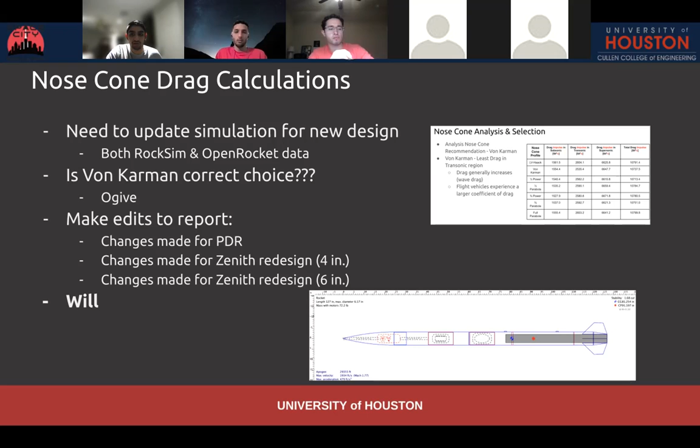Moving on to fin design, Gustavo, this is something you've been tinkering with on the new boat tail section, just modifying the fins and seeing what we can do to increase our apogee. But I think if we can give analysis and our validation team, specifically Mic and Amy, the chance to come up with one of their own designs independently. I know Mic was working on her own simulations trying to optimize a trapezoidal fin, but maybe now you guys can think more outside the box and try to get our 6-inch OpenRocket and RockSim files to 30K.

And yeah, I think structures is okay with putting fins directly onto the end of the boat tail, if I'm not wrong, if there are any limitations with that manufacturability-wise. Yeah, there is some limitation, but it's a challenge that they're willing to take if it's the only way we can come up with. But on top of this design you have here, there's two other things I've come up with, and the basis for the designs is one, not changing anything that's inside the rocket.

So for this one right here, I think one of the things that needed to be done was shift the center of gravity further forward by putting the avionics bay in the nose cone, and then all the recovery stuff can go between avionics bay and payload bay. That's gonna take some more work in terms of figuring out how that's all gonna work out. So a big plus would be if we can come up with an idea that keeps anything from shifting around within the rocket, so ideally all you have to do is mess around with the fins.

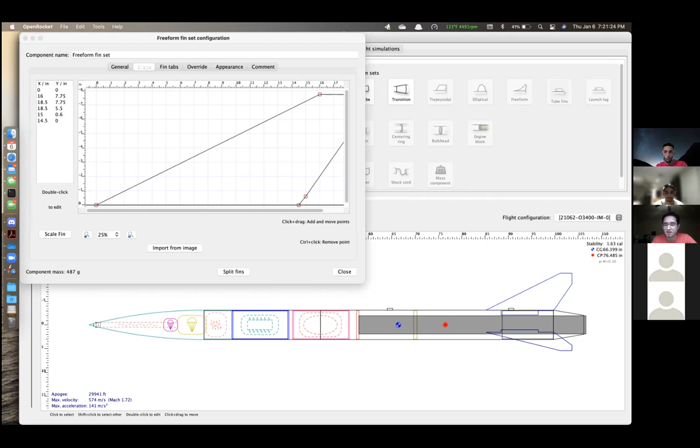Because it lands kind of vertically, face pointing up, the fins would take the brunt of the impact and they could crack. And if they were to crack, then you lose a lot of points in your flight performance. So yeah, the idea is they can sweep back, but a huge thing to consider is don't make them sweep back behind the end of the motor.

Gotcha. And then the other one I have, if you guys want to look at it, is this one - played around a little bit, 1.55 and then 30,200. The big perk here is that everything stays how it has been designed thus far, so you don't have to go through the trouble of redesigning a whole bunch of stuff.

Another thing, like you said Ravi, is the boat tail including the fins is a challenge. So if whoever decides to work on it later can come up with something that keeps it on the main airframe section, that's ideal as well, more so than having it integral with the boat tail. I'll hand it back to you.

Thank you for that. Wait, I have a question - what's the purpose of the boat tail?

The boat tail is really just to reduce drag. How it works exactly is a little beyond me and the scope, but just adding a boat tail does a lot for reducing the drag, and it's kind of surprising how much it helps - some like 2,000, 3,000 feet in savings there.

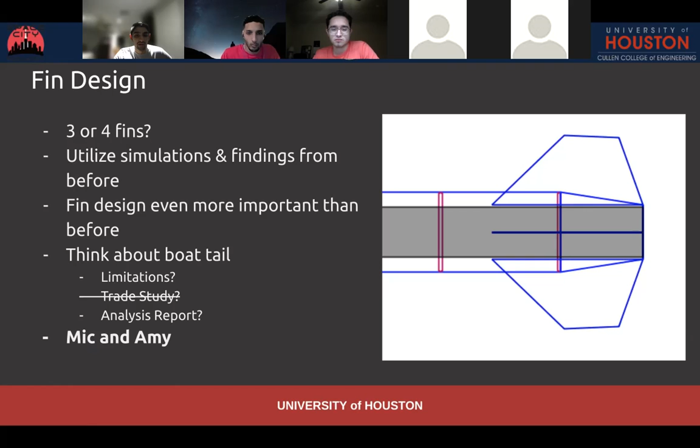Gotcha. So Mic and Amy, just keeping those points in mind - open to 3 or 4 fins, within the realm, trying to keep everything the same within the design and just changing the fins, and preferably not venturing onto the boat tail, although if you do need to, it is possible.

So that brings us to the fin flutter analysis. It was relatively easy to calculate with our trapezoidal fin shape from Apogee Components and their newsletter with their equations. Most likely, I think with your fin design, you may find that non-trapezoidal or a free-form set of fins may perform better. So I think Randy recommending the RasAero tool for fin flutter will be super helpful.

But I know Montreal used, I think, 2 or 3 different ways and then compared results with those different formulas. I looked into some of them and some of them seem super complicated, and I honestly doubt if they genuinely did all the calculations, because it's a crazy amount of partial differential equations and matrices, all for calculating flow and drag and a bunch of nasty stuff. So I haven't taken a look at RasAero's stuff yet, but that should be helpful.

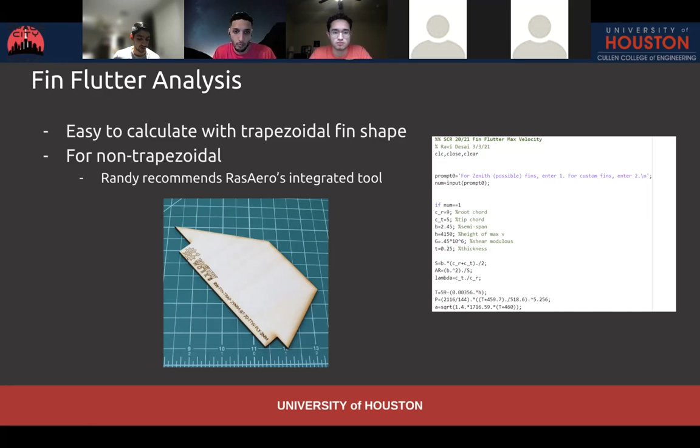And I think kind of cross-checking as you move along with your fin design, what your fin flutter analysis or fin flutter velocity looks like, because OpenRocket may say we can get to 30,000, but if our fins are going to flutter, then there's no point in using that design, obviously. So cross-checking as you move along in the design will be helpful and something you should do.

And the main things I would want to gather from an FEA on the boat tail would be some stress points, and then also a thrust value or force that we can say will start to cause deformation and failure.

Unfortunately, I believe we're planning to manufacture the boat tail out of fiberglass, which, as we all know, is absolutely fun for FEA.

So maybe simplifying and talking to Andrew again about how he could approach this, and also talking to Structures about their ideas for the motor retention system, and also how the fins will be secured, which I guess also plays into the fin design and when that gets finished up.

But I think starting with the CAD of the boat tail and thinking about how our motor may be secured, and how we can calculate a thrust or force value that will cause deformation failure, should be good.

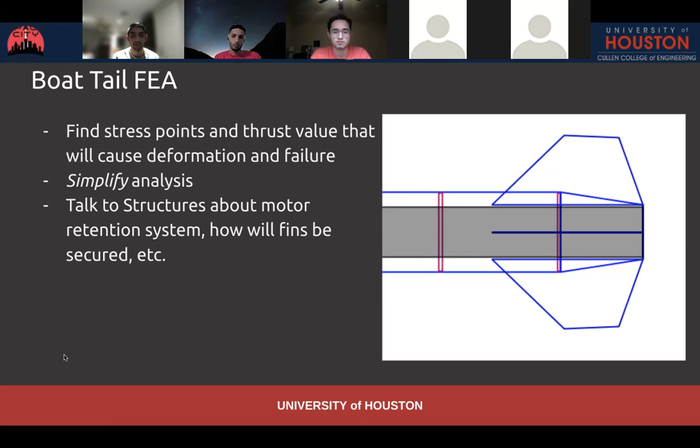And now onto CFD. I think I recorded this earlier as well, but just to restate, for the rest of the design team, I know the Zenith CAD is kind of up to date, minus the boat tail and the fins, which I guess are to be decided.

So I think transitioning into CFD now will give us a lot of benefits, if not for this semester, definitely as SCR grows older and into the next year and years past.

So I would like us to use our learning FEA experience to hopefully help us transition into CFD much easier. And I think the three biggest ways in which we learned from FEA, and obviously everyone learns differently, are watching some YouTube videos about the software and the goals you're trying to achieve, and then finding learning resources outside of that.

So I know for Siemens, there's a bunch of forums online where you made your account, and I think they also have their own set of videos and learning material within each software. And then also just beginning to research maybe outside of rocketry in general.

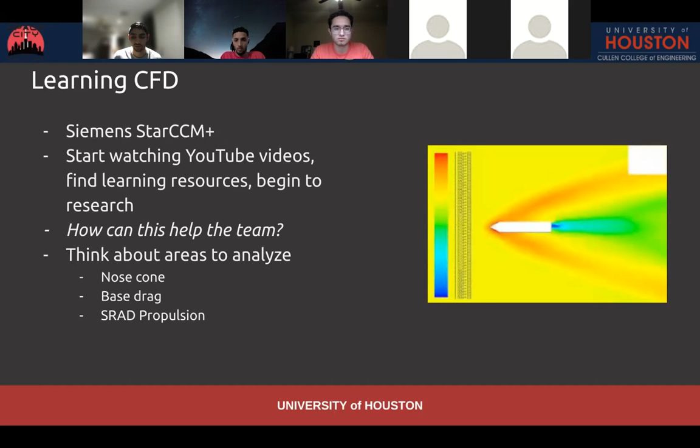But I think the further goal that I would have with this is to ultimately aid SRAD propulsion in their designs, because I know Aussie was looking at using CFD to start to analyze how their motor and engine design could be optimized. So kind of one for the future and one that will take a lot of time, but getting started as soon as possible, I think, is the best move for us as a team.

So our action items: Will is working on the nose cone drag calculations, and I'll help you out with the RockSim stuff. After you finish that up along with the report, we'll move on to helping Mic and Amy with the boat tail fin design and the fin flutter analysis, both working in tandem.

With our design team, Arturo and Omar, the dynamic duo for FEA, working on the boat tail. And Christian, Nikolai, and Jacob, who were previously working hard on the Zenith CAD, you guys have done a great job with that. But if you have an interest in doing some boat tail FEA or other FEA projects, we're definitely open to that, kind of up to you.

Other than that, I think talking to other sub-teams for help with CADing their systems - hopefully if we can save some of their time that they may spend CADing, we can all benefit and they can start to advance on other things while we take care of the CAD for them. And then learning CFD and starting to gather those resources as well.

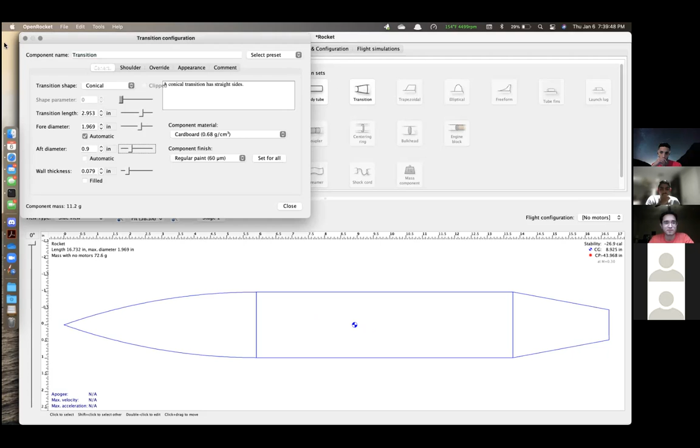So let's say I want to put some fins onto this section, and I want to make it go back this way. I can go right here and play around with where different parts of the fins are. Let's go, if you go to general...

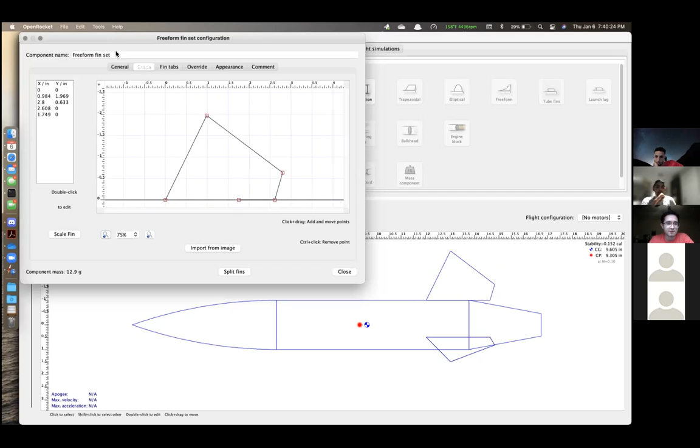Right, I can't make a point below 0. Like I can drag it down, but it won't go below 0. Yeah, if you go to general and then position relative to, make that negative, like you just lower that or increase it. It won't go below.

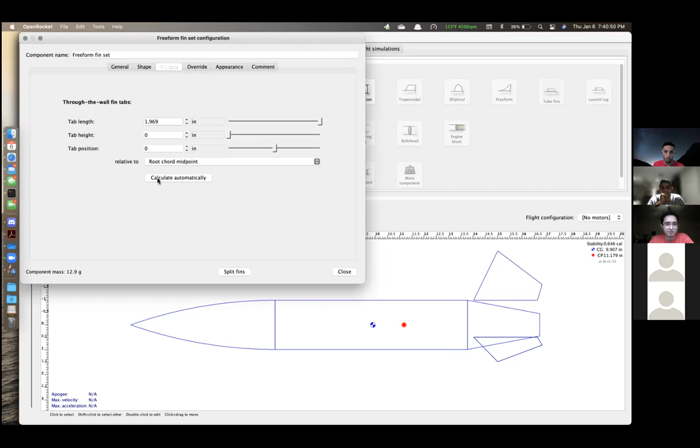I mean, I can add tabs as well, but I'm not sure tabs have aerodynamic effect. Yeah, I don't know how it calculates each of that. So I'm just commenting that it's weird, I'm not sure how it affects anything.

Or like if I go over here, if this is being calculated considering all of this, the fin, and not just the part that's external to the rocket. Because if that's the case, your center of pressure is a lot lower, or I mean your stability is a lot lower.

Yeah, for what we're talking about, and I guess the physical challenges as well, I hope we can get a fin design without having to go onto the boat tail, because it seems like it's just complicating a lot. And I'm not sure if we could trust OpenRocket with the different ways that we can put it onto the boat tail.

Can't you have it attached to the 6-inch diameter portion of the body tube and have it extend down but not attached to the boat tail? You can't have it extend inwards at all, it won't go below 0.

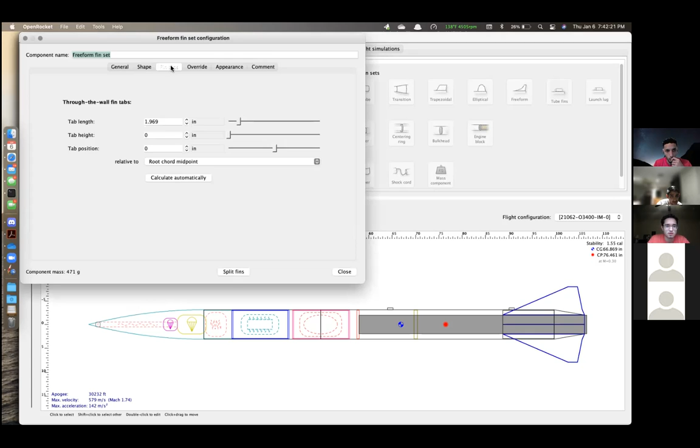So when I pull up the shape thing, it has like a flat... yeah. But do you need it to go below 0? If you have it attached, it could just hang and be flat. I mean, I guess it's not parallel with the boat tail, but I don't know if that matters in terms of apogee.

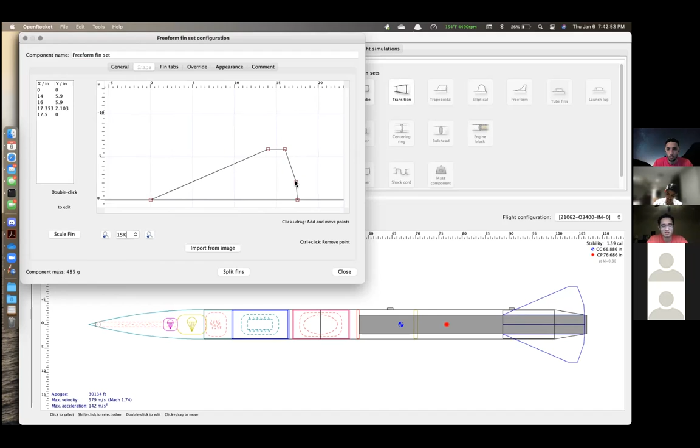So if I wanted to add another point, like let's say move this point outwards and then down below, I couldn't make it go below anything. I mean, in this case, can I cancel that? I want to hit Control Z, but it doesn't let me.

Is there an undo button? No. Oh, that's why. I got you. I'm on Mac, not Windows. I'm getting used to the computer at work.

But right, it won't let you go below 0 when you have a freeform fin, and 0 is the diameter of the component you're building on.

Gotcha, but my point is, why does it need to go below 0? It can be attached to the 6-inch diameter part, and then you just move it relative. Because you want the bottom of the fin to be on the transitional piece, attached, not just hanging.

Yeah, so in this case, if I wanted it to be right here and go backwards, I want it to be attached. I want most of the fin to be attached to something, right? I guess technically I can just have this go straight out, but I'm worried it'll just flap around too much.

Okay, I got you. I mean, yeah, and that design you have right now kind of eliminates the need for what you're trying to do, right? You just attach it to the 6-inch and have it, or do you still want the end of it to hang and attach to the transitional piece?

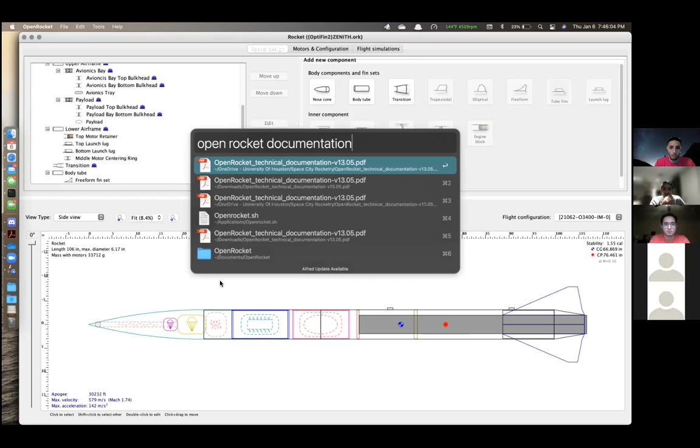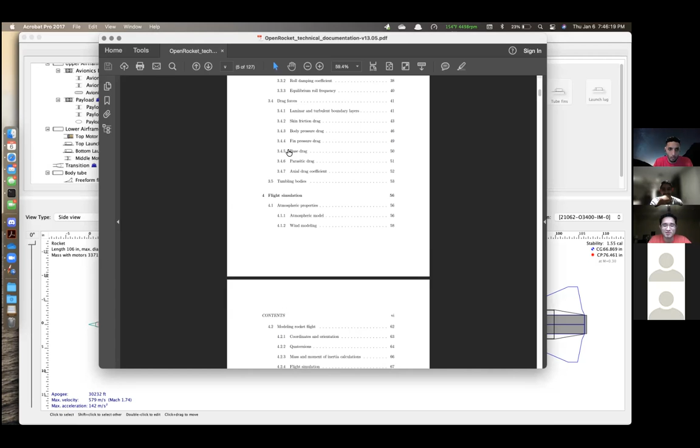So OpenRocket actually has a PDF of how they calculate literally everything, but I haven't gone through it, so maybe it's worth it. It's dense, it's 127 pages of how they calculate every single component, and some of these calculations get pretty nasty, like this one. So yeah, it's just not fun to play around with. But this is actually the part where it's saying how it does aerodynamics of fins, I think.

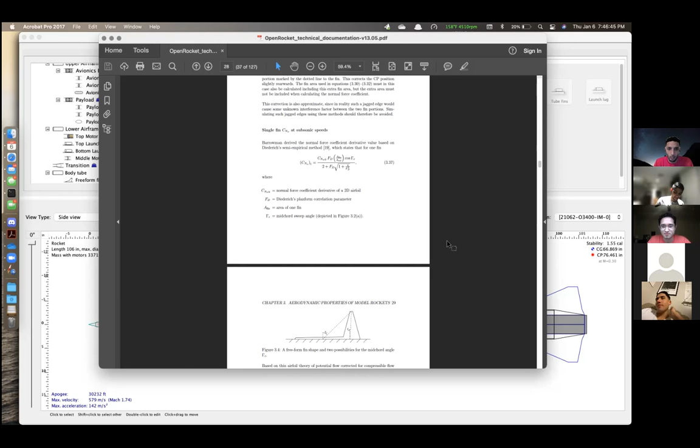Hey Goose, I have a question. Yeah, go ahead. Why do you say that the manufacturing process is a bit more difficult than for the design that's on screen? Why is it harder than the other one?

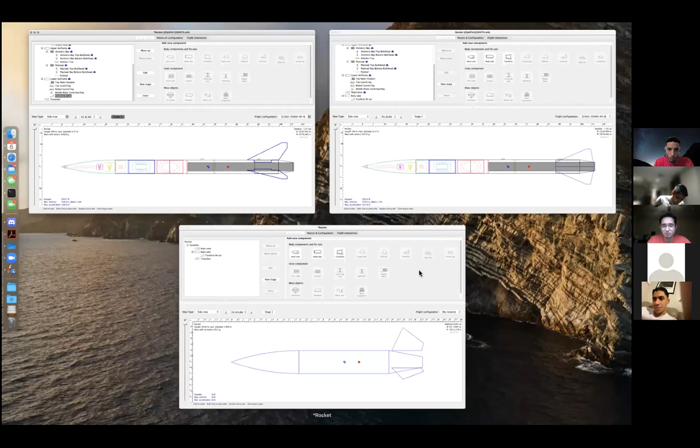And that's complicated because now we have this section that isn't uniform diameter. We have to make it part of this. Making a boat tail is already a challenge in and of itself. So the extra complexity is something we could theoretically manage, but we're in the blue, we don't know anything about it.

I understand your point, but the fin cord or fin tab would be essentially the same thing, nothing changes. All you would do is add the slot on the boat tail for the fins. Yeah, it would be the same thing, but now you have 4 sections of boat tail if you do this, because the slot would have to be cut.

Yeah, I mean, to eliminate that problem, you cut a slot on the fin so that it slides onto the boat tail, kind of like with Oberon's fins too. You cut a section and instead of the fin going into the boat tail, the boat tail goes into the fin, if you know what I mean.

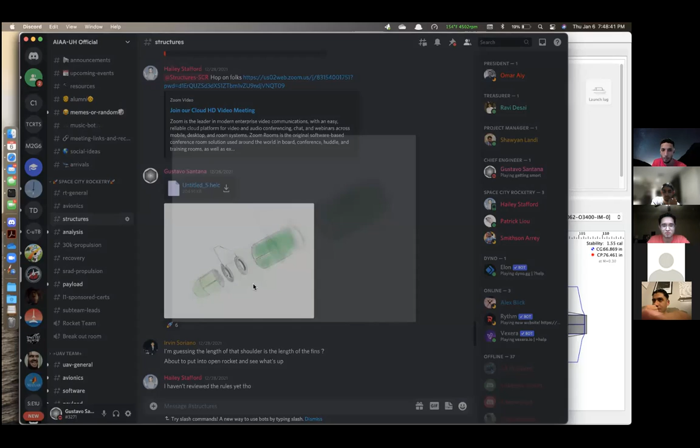You're talking about just a single slot for the fin to go into? Oh shoot. Hmm.

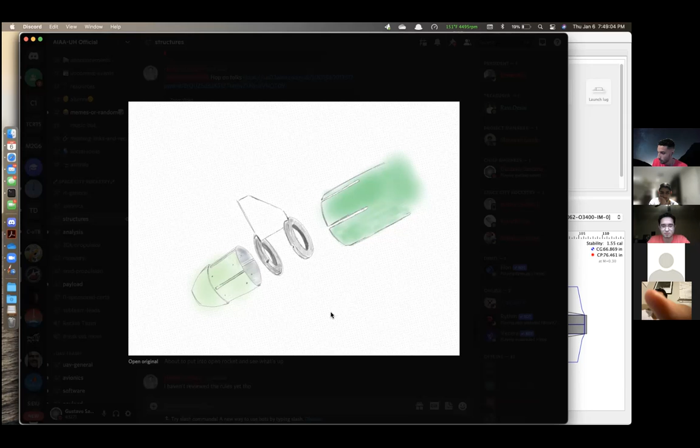Looking at this over in OpenRocket design. I'm not saying it's impossible, but it takes a process. The thought process we're running into right now is what we're trying to avoid in time crunch mode. We're not saying it's not doable, because it definitely is, but there's challenges with it, and if we can avoid dealing with those challenges, that'd be good.

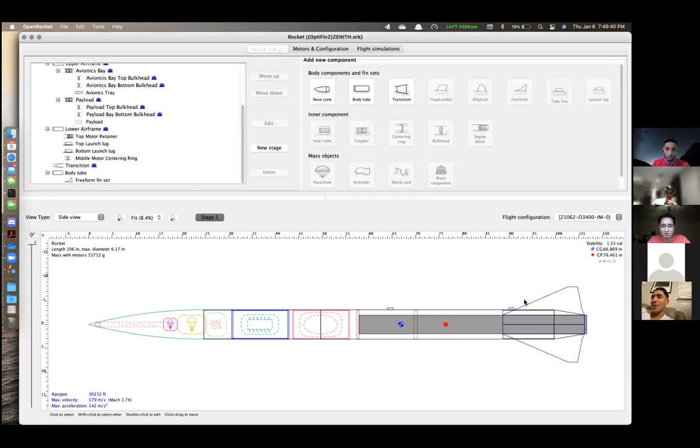Okay, because this one actually shows 30K instead of the other one at 29, and I'm just kind of pushing for that one, but it's up to you. This one I got to 30,000 a second ago.

You changed the fin design, right? I'll play around with it some more, but essentially I had 30,200 with a stability of 1.55. But I had to undo it. Maybe that would be the best one. The point is, it's doable.

The question here is, does this sweep backwards cause problems in terms of fin flutter? That's a good question. I would think so because it extends.

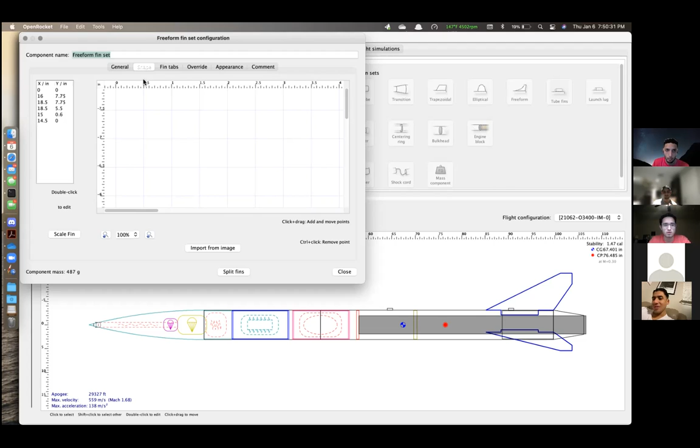This is assuming we have a 3/8 inch thing, but if we do a 1/4 inch, that tanks our apogee a little bit. I have to move this thing around 100 times. I went down like 1,000 feet. So yeah, it just makes it difficult.

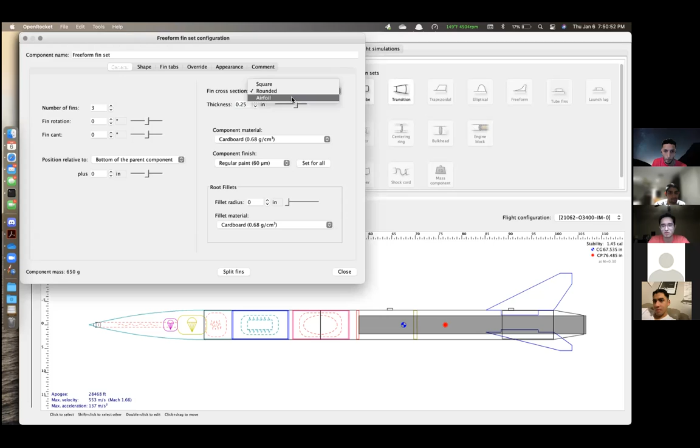And this is rounded - what if we do an airfoil? Rounded at the front, knife's edge at the back. That went up 1,000, 1,100 feet. The problem with rounding and airfoiling is if you don't do it perfectly even on both sides of the fin, you can start inducing lift, and it'll start rolling or spinning the rocket.

It is doable still though. It's just something to keep in mind.

And honestly, we can do something like a 1/5 of an inch. You get 30,000 exact. I mean, that stability is a little low, we can play around with that. But honestly, at this point, it's just tinkering around with it. I don't have to do that on a recording.

I think you should change your material to fiberglass or carbon fiber. What was the material? I think it was cardboard. Wait, what? I was wondering if there was. Oh, I mean, it adds a little bit of weight, but it should be phenolic kraft.

I just bring that point up because I think the weight will be crucial for stability, for the center of gravity. Material is crucial. What if I go to carbon fiber? It should be towards the top.

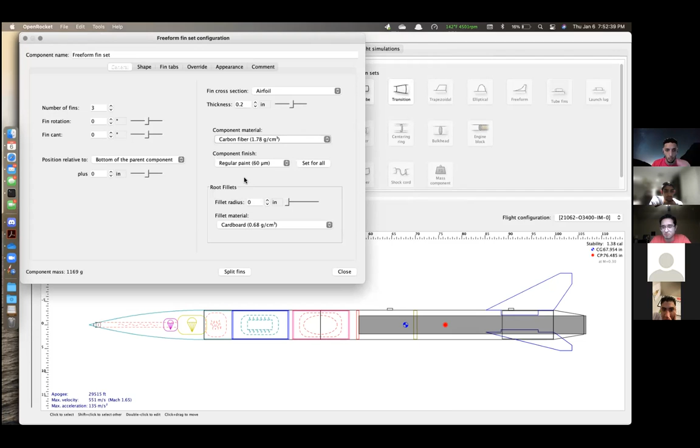I don't know if you want to keep the recording going with this, but it's worth it. I'm gonna make this 8 inches. We got 1.5, which is good. We're low in terms of the apogee.

What if we go back to... So this is another problem, I guess, if you guys want to think about tackling this - I'm just punching numbers in, being a human computer, trial and erroring. I was trying to figure out if there's a way to optimize this process. The only thing I could find is a rule of thumb that a 70-degree sweep is ideal. So I punched a bunch of things into Excel to try to get a 70-degree sweep, but it's weird and takes work. I haven't done it yet, but if there's anything else that could be used to optimize a fin rather than just punching in different numbers and seeing what OpenRocket tells us, that'd be really good.